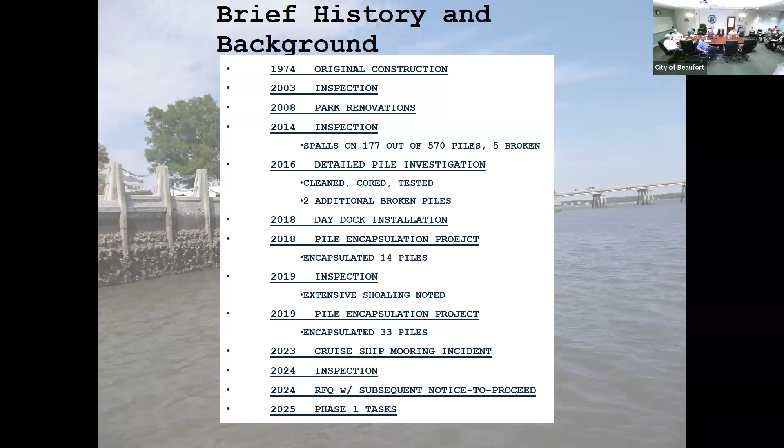Also, when you consider the age of the structure, it was time to start looking at, okay, what would a repair or replacement scheme look like? How much would it cost? And that's where we made the recommendation in our 2024 report to go ahead and initiate the preliminary studies that are necessary to move this project forward. So if you go to the next slide,

2024 inspection noted that we still had extensive shoaling, continued deterioration of the piling, and then some other defects above the water line. And as I stated, the recommendations, including initiating the preliminary engineering studies required to determine the safety, the serviceability, and replacement strategies, and determine the most advantageous option in terms of cost and scheduling for the city of Beaufort. That was a recommendation that we made in our structural report.

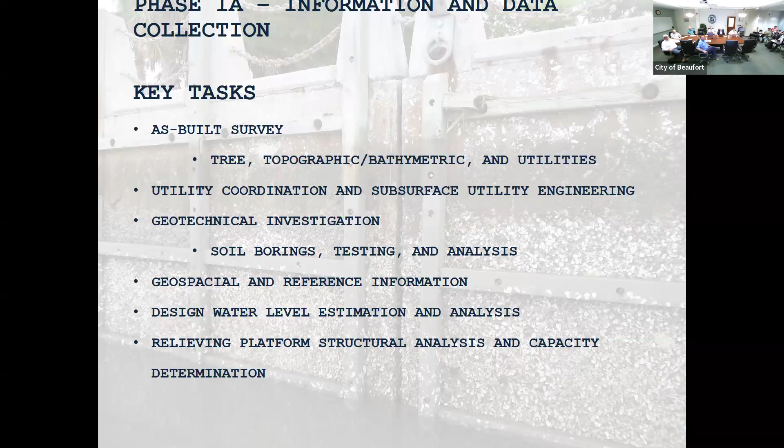And then one of the larger components was the bathymetric data, what the channel bottom looks like in front of the structure, which is substantially different than the design condition, and it's significantly different than it even was 10 years ago. So again, substantially complete on the as-built survey. Next slide.

Utility coordination and subsurface utility engineering. That's partially to, I will say, substantially complete on that. So part of the as-built survey required utility coordination. They had to get together with the utility companies and figure out, okay, where are these utilities? Let's go ahead and mark them so that we could get them surveyed. And this is power, water, sewer, anything else that may be in the vicinity of the relieving platform at the park.

And then what is essentially left in that phase is determining, okay, if we need to build an entirely new structure, how do we relocate or bypass these utilities to minimize the disruption of utilities that service the park? So that will likely be accomplished in later phases as we come up with potential design alternatives. There will be a lot of back and forth with all of the utility providers to continue to figure out what a bypass route would look like. You can go to the next phase.

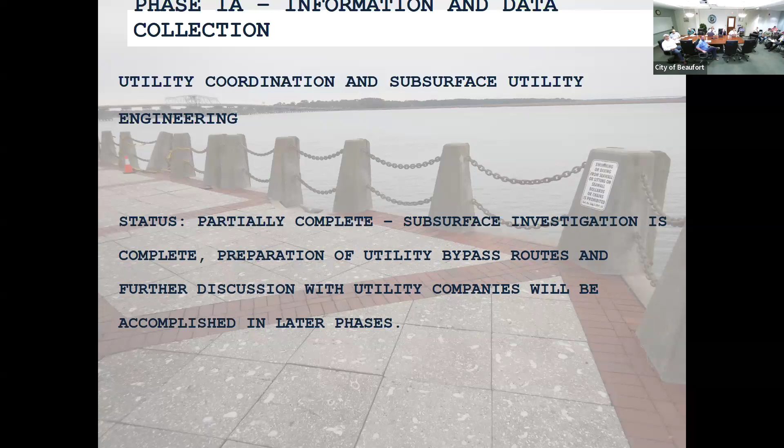Cover some of the geospatial and reference information. So again, that's a broad term. It just says we're gathering every data set that we can for the local area. So this is mainly for permitting. It's determining what kind of historic, cultural resources are available in the area. Are there any archaeological concerns in the area? And then also the as-built survey is kind of lumped in with that geospatial. And then we'll also be looking at GIS data sets and the like.

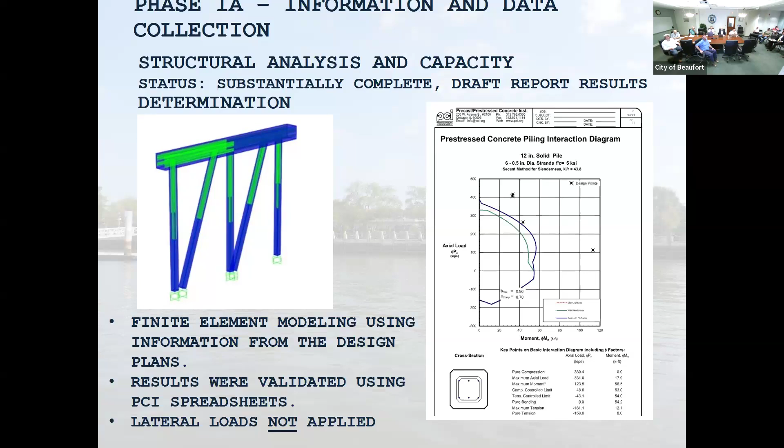the draft results are not favorable. What we found by plugging in the original design loads, just the dead load, the weight of the soil, and the live load, the weight of the pedestrians on top of the soil, is that it appears the original structure was designed essentially to full capacity. The structure was designed to use up every available bit of capacity in the structural members.

So what we found based on that analysis is that the outermost piles are using about 95% of their utilization. The innermost pile, the center pile, is actually overutilized by our analysis. And the remaining piles are anywhere between 58 to 63% utilized in their capacity. What is also important to note is that these results were based merely on the live and the dead load, the vertical loads acting on the piles.

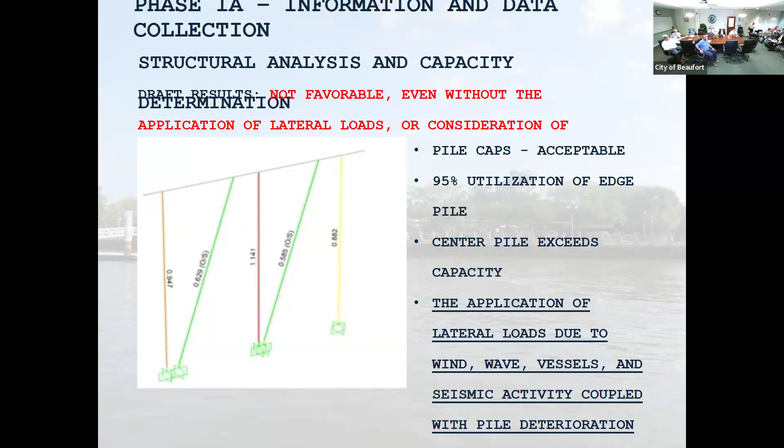They do not consider lateral loads from current forces, wave forces, wind forces, or any vessel mooring loads. So the application of those loads would only further validate the model, and the results we're getting are showing that some components are overstressed. If you go to the next slide.

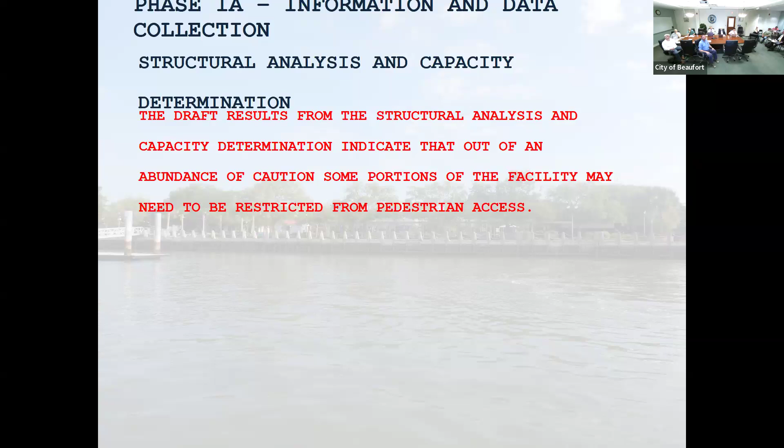So as a result, at this point, we have just received the draft of the analysis. We're still going through and looking at potential ways to refine the analysis, coupled with the geotechnical information, to put the finest point on this analysis that we can. But the draft results indicate that out of an abundance of caution, some portions of the facility may need to be closed and restricted from pedestrian access.

So that is the problem right there, the piling that look like that underneath the relieving platform. This is after we had gone in there and pressure washed the piling and removed the marine growth. You can see the prestressing strand exposed, and what started out as a 12-inch square pile is closer to an 8-inch round pile at this point due to the deterioration. It's intermittent throughout the facility, but it's widespread.

So for those reasons, it's likely we're going to have to implement some safety controls once we further vet the analysis, and once we do our final review of the analysis, it's likely we're going to have to, like I said, implement some safety protocols.

Bill, I've got a major event coming up, as you know, and I don't want to rush the process of being able to pinpoint and say which areas of the park we need to close off to pedestrian traffic. But with all that being said, what is the realistic expectation of when you might have that information available?

This week. Okay. We're aware that we're 25 days from Water Festival. We have 4th of July, the Shrimp Festival. So in full transparency, I received the draft report this weekend. And so what we're doing is, after reading the draft report, going back, talking to the geotechnical engineer, working with JMT to see if we can't further refine the analysis to give us a little better feeling for the current condition. Thank you.

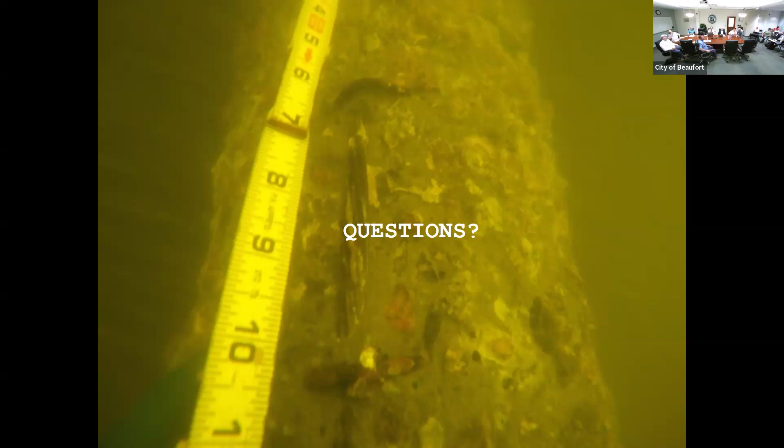If you get to the south end of the facility towards the marina, the current rips through there. If you go to the other end, the current rips through there. In the middle, not so much, because you get a lot of friction from all the piling inside the relieving platform. And the relieving platform also has that big fascia panel on it, so you can't see underneath it. So the current is essentially stagnant in the middle of the facility, and that allows all the suspended particles in the water to settle out.

Based on what we've seen with the shoaling rates, we've seen it get larger and larger over the years. And as you get more shoaling, you get more shoaling. And the initial design did not take that into consideration? To my knowledge, it did not.

Bill, can I just interject a comment? So people ask, why is it called a relieving platform? Essentially, this is a wharf, a marine structure used to berth vessels that's parallel with the channel, versus a pier, which is perpendicular. A relieving platform, as I understood it, is relief from shoaling. If you're looking at the cross section, if you had just a wall there, the slope of shoaling and the angle of repose of the soil would begin at the wall. But when you have the berthing wall offset 30 feet and then have the retaining structure, it provides shoaling relief. Does that make sense? So I think it was designed with some intention. I'm assuming. Can't really speak to the designers today.

How would a new design address this shoaling problem? We have not gotten to that point yet. That's more a question for Chris over here, who will be doing the hydrodynamic modeling. Would you? Well, from what I've seen, when I work with the Corps, you can use control features like containment or constraining dikes and control the flow or redirect the flow so that those suspended sediments go to a different location than falling out of suspension underneath the relieving platform.

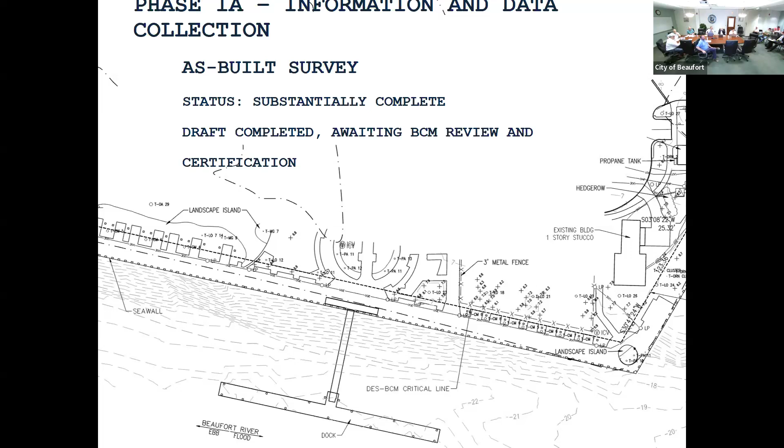Is the relieving platform tied into the retaining wall in such a way that a failure of the relieving platform would have some damage to the retaining wall? That is something that we did note in our analysis, that it does appear that at least at the park proper, where you have the relieving platform, the way that the platform was detailed, the platform also provides the lateral resistance to the seawall.

So in this case, it's kind of hard to tell in here. But here's the fascia panel that everybody sees out in the river. Low water gets down to the bottom of there. You usually can't even see up under here. It's only when it goes negative. And that seawall is way back up here in the park.

From our draft analysis, it does appear that what's not shown in here is there is another concrete member in here, a strengthening member that goes in and out of the page this way. And we believe that was in there because the relieving platform actually does provide a resistant system to the seawall, right? The seawall is holding back the earth. It wants to rotate out. The earth wants to push it out this way. And the relieving platform is actually pushing back against it to buffer that.

As noted in that representation, you'll see some of the piles are leaning as if they're pushing against, they're in compression, pushing against like a buttress. We call those battered piles, which resist lateral loads. By all indications, and this is somewhat of a puzzle because we're going back to the era of leisure suits and disco.

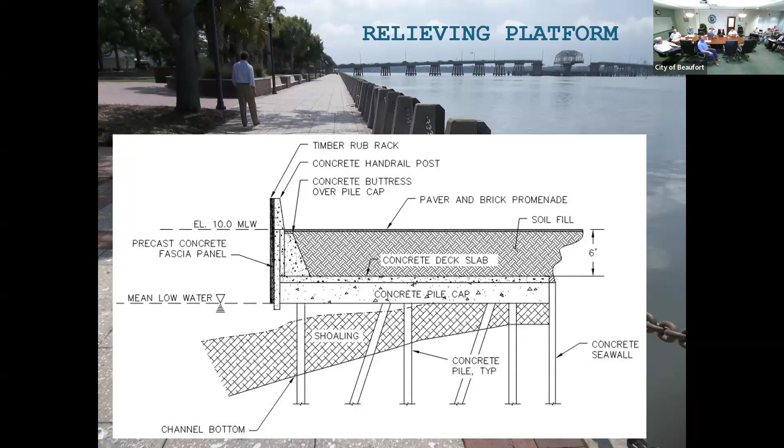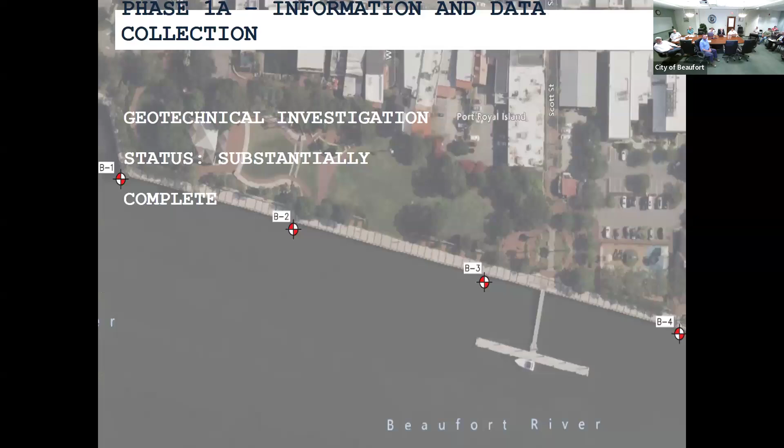So when you took the geologicals drilling down from the other report there, what did you hit? We have to look at it. Can you go to, so these are again the draft logs, just two of them. There you go. So it looks like we were hitting bluish gray, non-plastic, well-graded sand, and dark gray dense sand at this location, and then over here was again well-graded sand and dense sand. So where these particular borings were taken, it doesn't appear we hit any of the limestone.

When we did the day dock, the piles for the day dock that are out in the river, we definitely hit it because we were not able to get the split spoon sampler to penetrate any further. So we were hitting refusal out there, and I think a lot of that has to do with deeper, just the way that the stratification of the soil layers go.

I have a question from Mr. Scalati online. He says, what is the difference as far as regulatory processes in terms of backfilling versus replacing? The difference is you're looking at what would be considered filling wetland. Chris, you worked for the Corps, so the big difference is you're looking at what is considered shading, which will be a pile supported structure, and filling, which is a completely different regulatory process. It's significantly harder, more regulatory work to fill a wetland of this magnitude than it would be to do a pile supported structure.

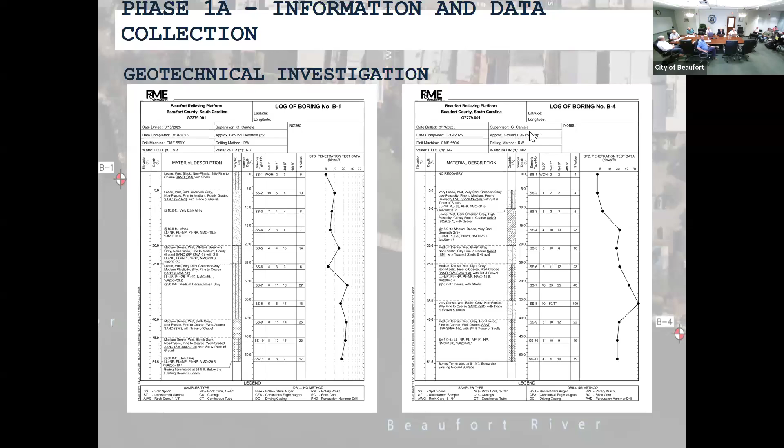For those of you who are present in this meeting, either physically or remotely, who wish to comment or have a question concerning this engineering presentation, there will be an opportunity for public comment toward the end of this meeting, at the end of the agenda.

Can we be issued a copy of your presentation? Yeah. Can we get it? Yeah, so we can see the different phases, what they're made up of. And the data are shown on this page. Along that note, the request for the PowerPoint presentation, has everyone been able to access the SharePoint site that was set up? I know. He helped me. You were able to. Yeah.

Hey, I'm actually gonna take this, I gotta go to another meeting for county council, so. You're familiar with our communications. Yeah.

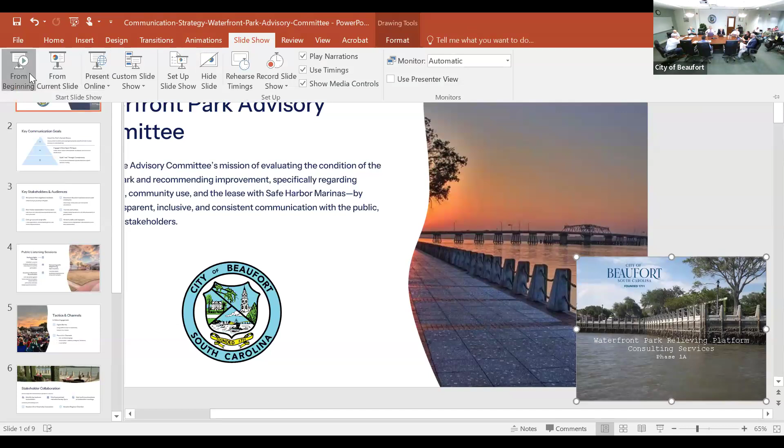We will have the rest of the 20 documents updated into the SharePoint for access for the entire committee. And you all have gotten email from me. We also have a Word document in there called committee questions and requests. Any questions, concerns that pop up outside of these meetings, we'll just log those in that document so we can track those requests and make sure we're getting those answered. And those answers will come to the entire committee, not just the individuals.

This is Ashley Brandon, our public information officer. I neglected, right at the outset of this meeting, to have the roll call. And better late than never, I guess. Tracy's got you taken care of most of the time. It's when she's not here that we get lost. Maybe I shouldn't have admitted that I made a mistake. All right, I'm sorry. All right, JJ, go ahead.

No, you're good, sir. This is Ashley Brandon. She is our public information officer. She's going to go over different communication strategies and resources that this committee has available from the city, some of the things that we're already engaging in and recommendations that we have, to make sure the committee knows what we can do on your behalf to engage with the citizens and business owners that utilize Waterfront Park moving forward, because public engagement, participation, and feedback is going to be a big part of the decision-making process when we get to those options that the engineers just talked about. I'll turn it over to Ashley.